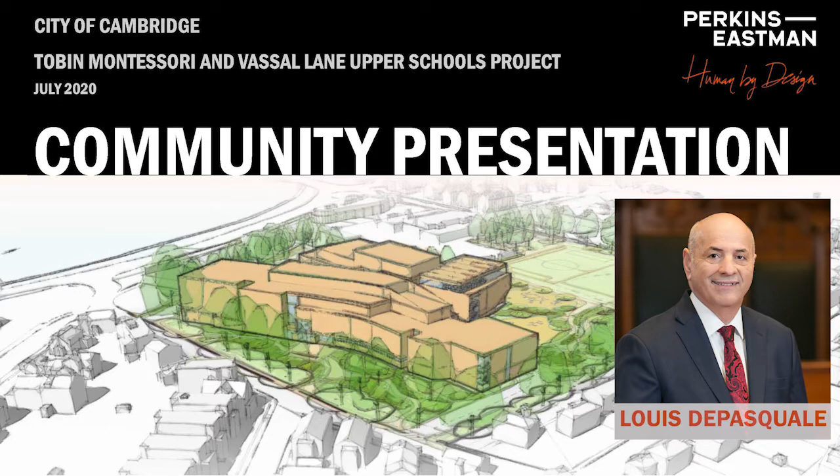I also want to thank the city, school, and design teams that have invested a lot of time and energy into refining the preferred option from the feasibility study into the preliminary design that we will be sharing with you in this presentation. The design you will see in this video is not the final design.

We will continue to seek feedback from the community. During this presentation, we will discuss the development of the Father Callahan Playground and other outdoor spaces on the site. Additionally, we will share initial thoughts on materials and building exterior concepts. As you know, demolition will not start until July 2021.

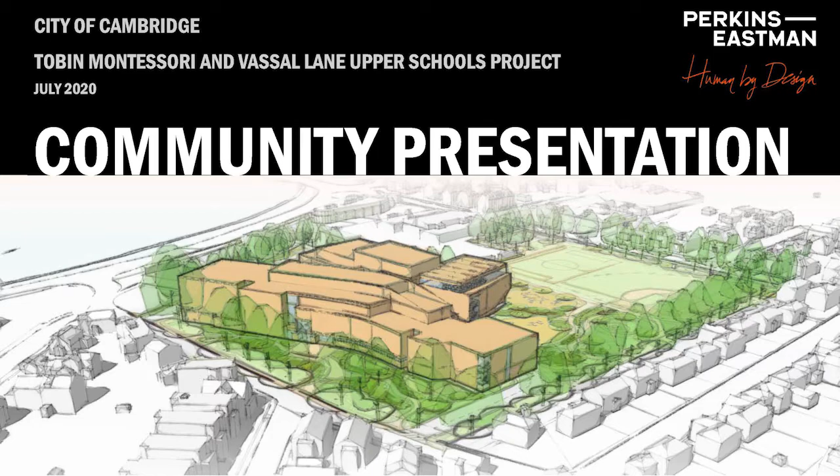Following this video, we will set up teleconferences where you can ask questions and comment on the work in progress. Your input was invaluable in creating the preferred option in the feasibility study, and we are looking forward to continuing the conversation with the neighborhood as the design develops.

Thank you, Louis. We are very excited to be sharing the current state of the design today. First, we will provide some context for where we are in the design process, how the COVID-19 crisis has affected the project, and discuss how you will continue to be able to provide input to our team.

Next, we will discuss our ongoing study of transportation on and off-site by focusing on the access to the garage structure beneath the building. Then we will review the state of the design of the site and the building. As the city manager noted, we have been working closely with teachers and city and CPS staff. Several members of the design team will share with you today how we have refined the preferred option through working with them.

This schedule shows the design phases of the project. Having completed the feasibility study, we are now in a phase called schematic design. In this phase, we are focusing on refining the plans of the building and the outdoor space, making sure that we have everything organized as best we can within the constraints and opportunities of the site.

As we will share later in the presentation, we are also beginning to explore what the building will look like. Schematic design lays the groundwork for subsequent phases of design development and construction documents.

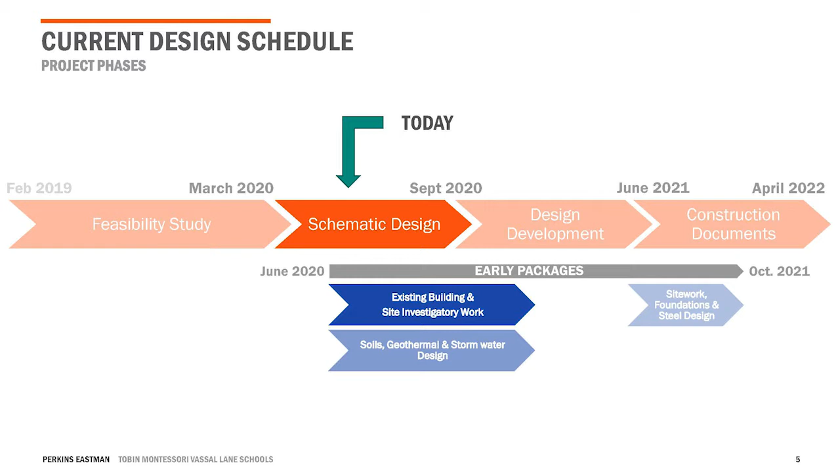This phase also allows us to prepare a few early sets of permitting packages that will enable the construction manager, W.T. Rich, to begin next year with abatement, demolition, excavation, and foundations, while we finish the construction documents for the rest of the building.

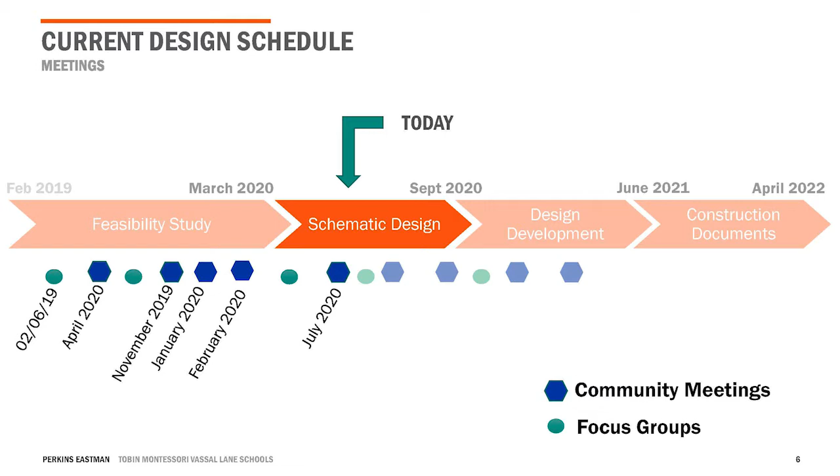You may be wondering how the COVID crisis has impacted the design and construction process. The most significant change is that the schools will not be moving out of the building this summer as previously planned. The logistics of such a move during the crisis was simply too difficult to orchestrate safely. Accordingly, the schools will stay on site through the end of the school year, and this will move the start of demolition and remediation to the summer of 2021.

As I will discuss in a moment, traffic changed significantly during the crisis, and we have also had to rethink the traffic studies that were planned for this past spring. But overall, the project design remains on schedule. Thankfully, we had a contingency planned into the project, and these adjustments have not, at this time, significantly impacted the design team. We will continue to update the schedule as the crisis continues to develop.

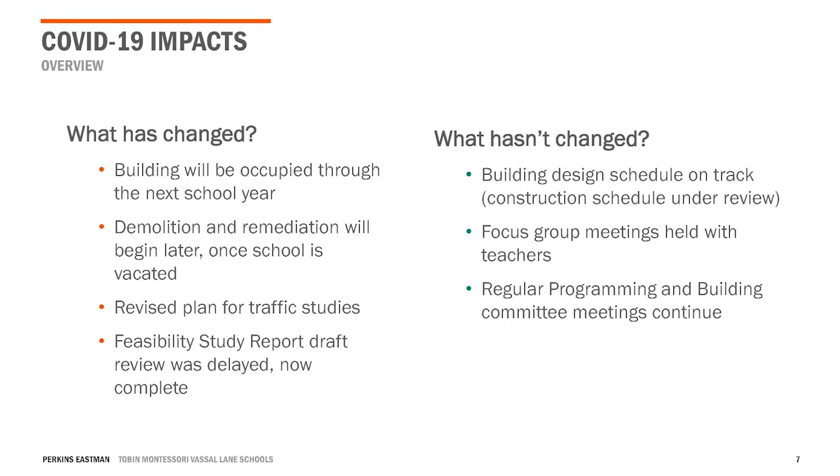Project goals include creating an environment that fosters health and wellness, and the design already includes good daylight, operable windows, dedicated outdoor air units, and MERV 13 air filters.

Given the current crisis, we have been reviewing the building and all of our projects for ways to further enhance these goals. Some measures have an impact on the layout of the building, which is especially important to review at this stage. We have been testing a variety of restroom layouts for improved safety and to encourage students to wash their hands.

At the same time, we are investigating how the building could change to a health emergency mode. One example would be increased ventilation. This allows us to design for an even safer environment while still meeting the project's safety and energy goals during normal use. In later design phases, we will pay special attention to the products we select, including materials and touchless technologies.

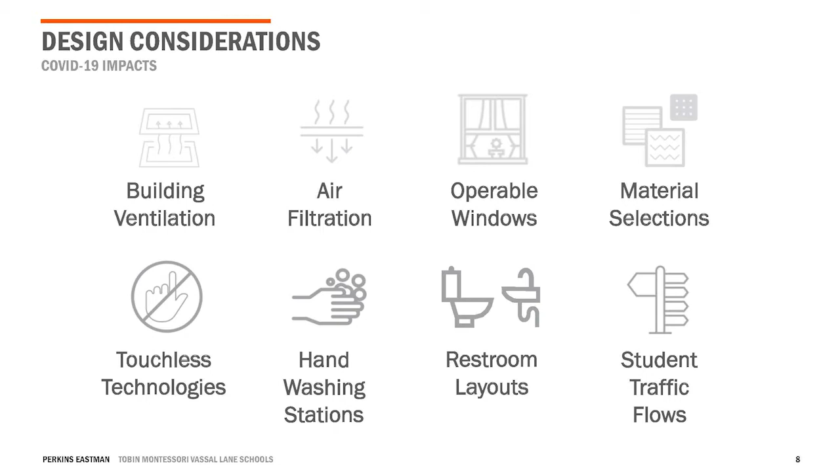We are fully committed to both a full traffic analysis and parking, transportation, and demand management plan. As I'm sure we have all noticed, traffic has been significantly reduced during the COVID crisis, but we still need to perform a transportation assessment, and it may not return to prior levels either when schools return in the fall. So we are tapping existing data, including anonymous cell phone location data collected before the crisis, to assess travel patterns and volumes representative of typical pre-COVID traffic levels.

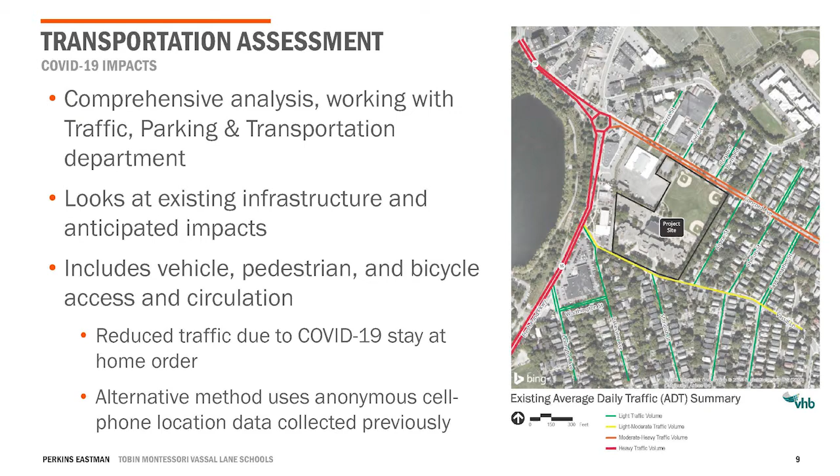Even without that data, working with our traffic engineers, we have been able to refine the design in response to your comments. Dan, why don't you tell us more about how that work is progressing?

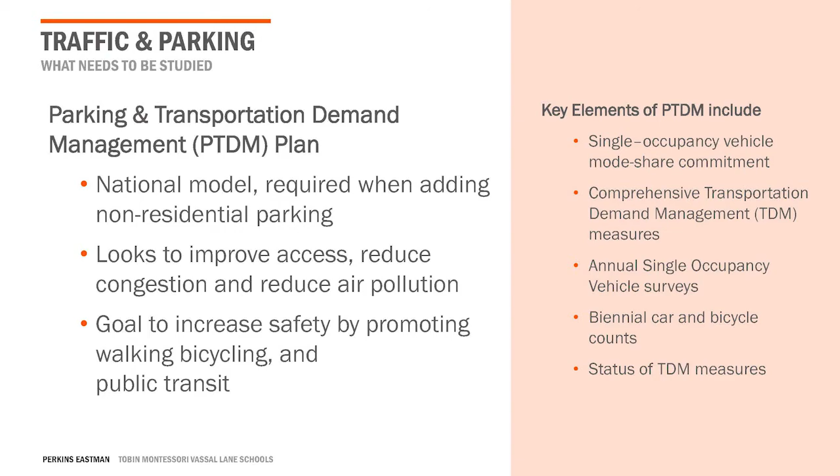Thanks, Carolyn. As you'll recall from the feasibility study, the building components have been gathered to the south side of the site to preserve and enhance the amenities of Father Callanan Playground. We'll talk a little more about how we've been reimagining the amenities of the playground and what it can offer and how the green space may be developed.

We imagine that the school will be delicately interconnected to the outdoor space. The site will have wonderful recreational space, including community pathways that connect bicycle and pedestrian routes to the neighborhood and Fresh Pond. In terms of vehicular access, we are studying traffic patterns around the site.

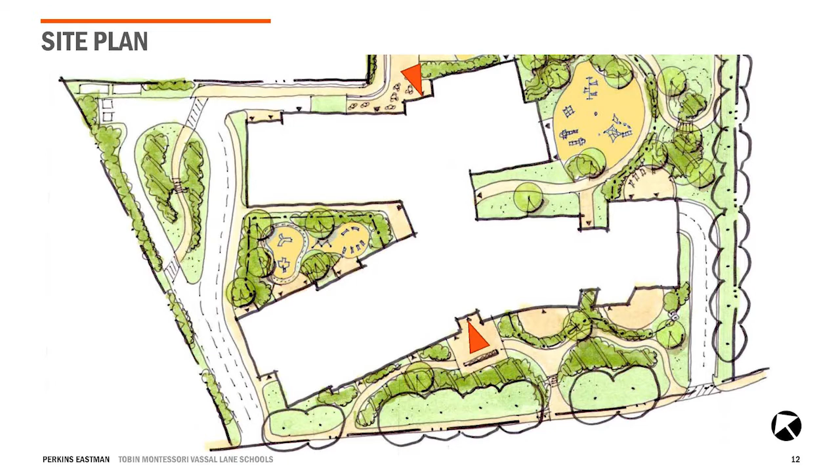We're also planning an on-site bus loop for student drop-off and pickup on the west side of the site, closest to Fresh Pond. Since the feasibility study, we have been considering how cars will be introduced into the 150-space garage under the building.

One of the goals of the feasibility study was to make the drop-off and pickup process work more efficiently and safely. One strategy to avoid unsafe conflicts between cars and buses is to separate each type of vehicle as they arrive on the site. To achieve this, in each option, roughly where the existing curb cut is on the west, buses will arrive on site and have their own drop-off in the west corner of the site, near the south side of the Armory site. This location offers the best opportunity for the buses to arrive, queue, and exit the site.

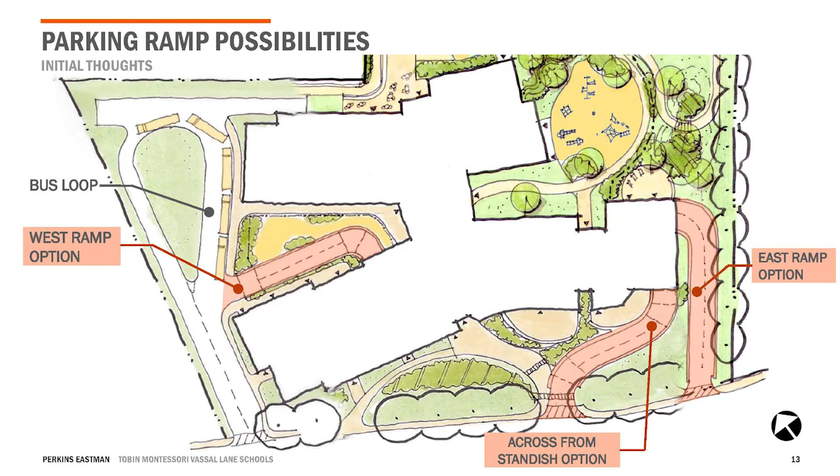With that one constant, let's walk through the options for car arrival that we are currently studying. The first option for cars arriving on site is what was shown in the feasibility study. As I mentioned, the buses will arrive on the west side of the site, and in this option, the cars will arrive on the east.

On the east, a ramp down to the garage, similar to the ramp to the parking garage at the Cambridge Central Library, will be accessed through a new curb cut. This option removes conflicts between cars and buses and can be accommodated without impacting the building program. Its challenges are that it requires some tree removal, maybe 2 trees, and it is closest to the adjacent properties along Alpine Street.

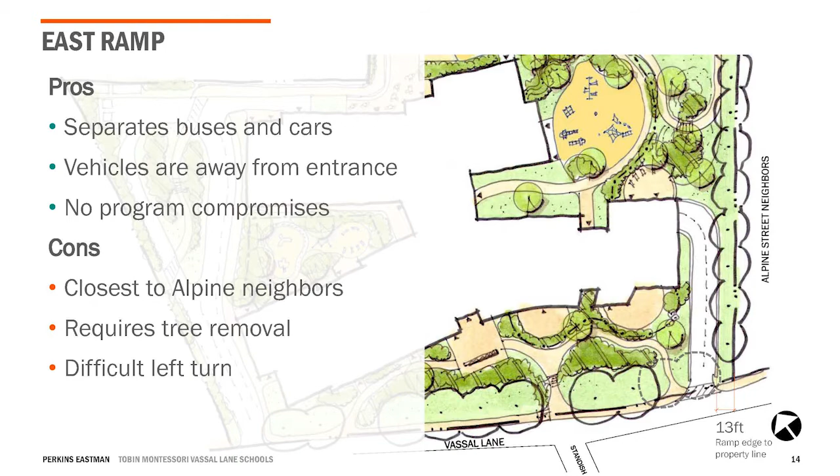Another option that also separates the cars and the buses works with the existing intersection of Vassal Lane and Standish Street. Coordinating with this intersection may facilitate the movement of cars through the community and situate arriving and departing cars where pedestrians are accustomed to safely crossing traffic.

The curvilinear shape of the ramp may also slow the movement of cars up and down the ramp, also enhancing safety. The positives of this option also include that it doesn't require the removal of significant historic trees, and this option brings the cars closer to the school's front doors.

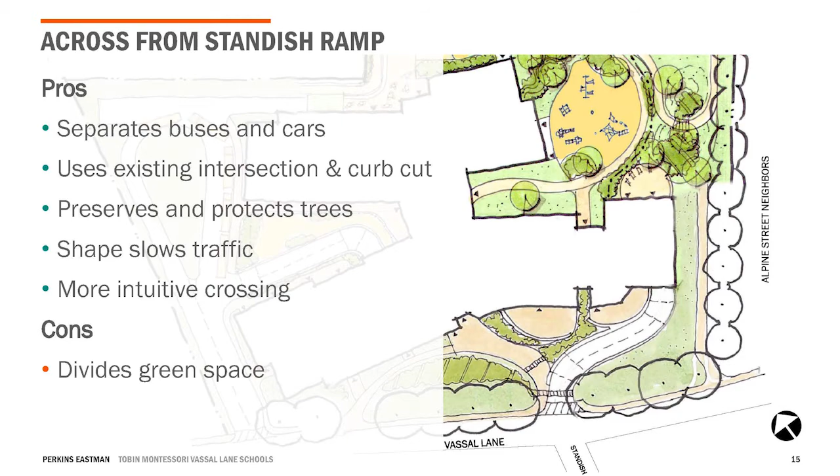A third option is to have cars access the garage through a ramp where the bus loop is on the west side of the site. This has a few advantages, including removing one curb cut on Vassal Lane and also concentrating traffic on the west side of the site. However, it has a few challenges too, including the mixing of buses and cars, which, as I noted, can raise safety concerns for the children.

And there's also a risk that there is too much congestion at this one point of access and that people will not use the drop-off in the garage.

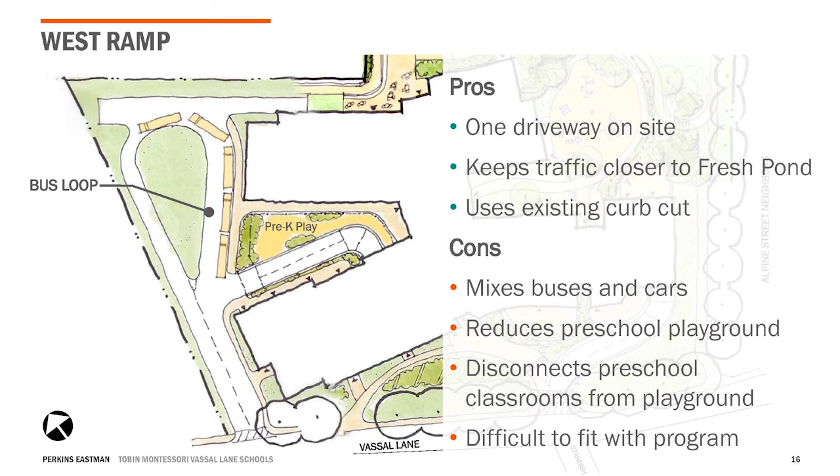That might place more traffic into the neighborhood, like the existing conditions. Chris Bradner will talk about some of our site strategies.

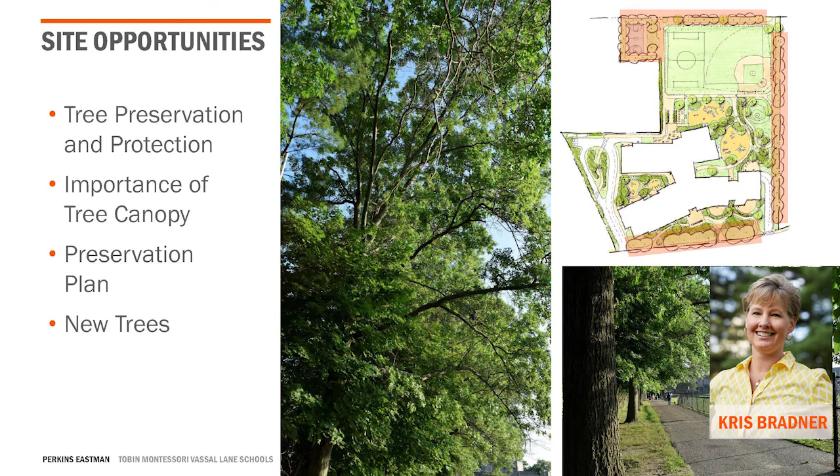Thanks, Dan. We've been working on other aspects of the site, including prioritizing upfront conversations with the city tree warden and his staff. It is the goal of this project to preserve and protect several trees around the perimeter of the site. We want to build upon the existing landscape to enhance what exists on the south, east, and north sides of the site while creating an even more attractive landscape within the campus.

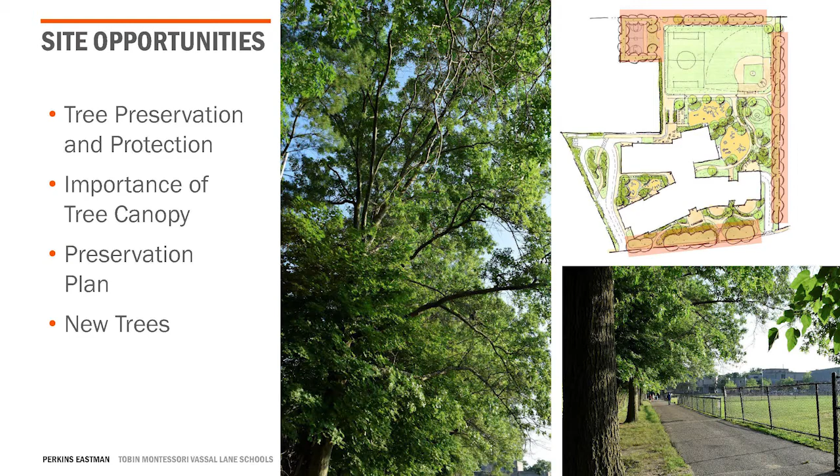We understand the importance of these mature trees as neighborhood value for shade, buffering, as well as carbon storage both above and below ground. Lastly, we will be working on meeting city requirements for tree replacements and presenting to appropriate review agencies in the coming months.

And returning to the outdoor space, you may remember the idea that we were trying to create a school building that is set within a notable landscape. Accordingly, we are continuing to develop a variety of outdoor opportunities for recreation and learning all around the building.

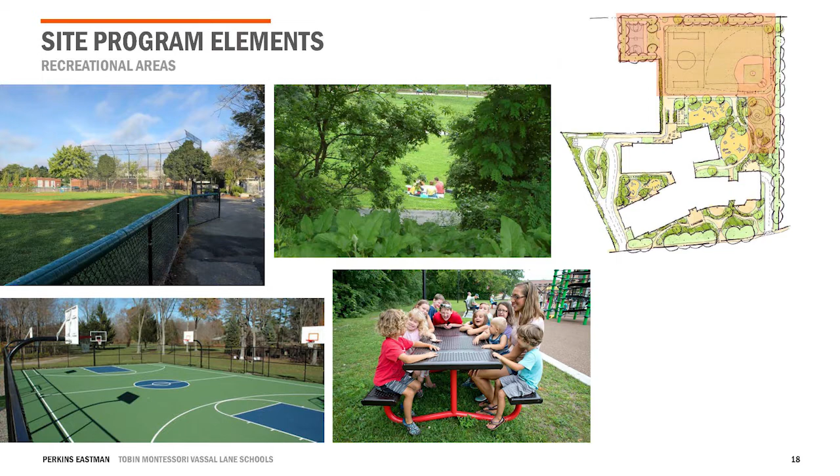Father Callanan Playground will continue to have open space and will feature a baseball diamond, a multi-use field, and a new basketball court. Directly adjacent to the fields, we will continue to develop playgrounds and seating areas that will provide opportunities for families and children of various ages to use the fields and the playgrounds.

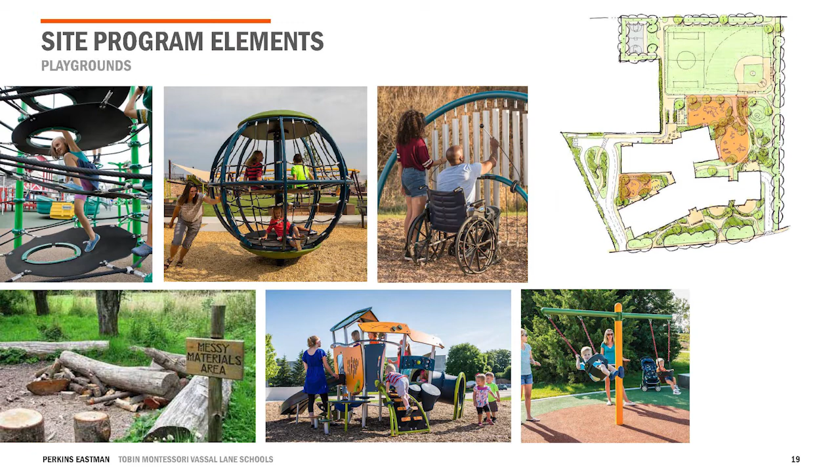The play spaces will be located at various spots around the building for ease of student circulation in and out of interior program space. Play spaces will be equipped with age-appropriate features, and materials and use will be natural and man-made for a variety of senses, imagination, and movement.

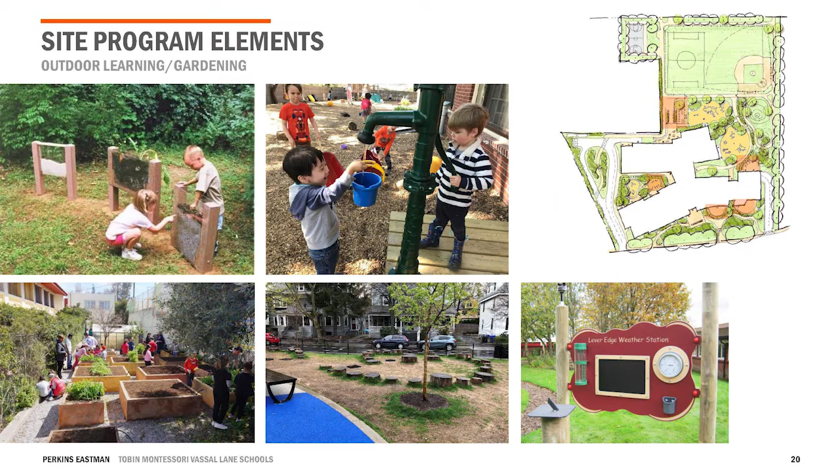Gardening opportunities will be provided for all ages and abilities. Some areas will be available for staff use directly with their students, while other areas will be coordinated with the City Sprouts program. Outdoor learning can happen anywhere, and the design of the campus will allow for a multitude of formal and informal moments for students to learn and create in large and small groups.

Lastly, we'd like to give you a preview of other ideas we're working on behind the scenes. As discussed in the feasibility study, our site's approach to stormwater and its contribution to the community's resiliency will expand beyond our site. We continue to develop the design of an underground storage facility that will collect stormwater from the adjacent city streets.

This will help to mitigate flooding in the neighborhood and around the site. We plan on taking advantage of every opportunity to overtly express the environmental design of the project and bring it directly to the students and community, visually through signage and by direct contact, showing processes. The community path continues to connect our site into the larger context of bikeways and walkways.

We are working on some other exciting ideas to extend learning from indoors to the outdoors in the courtyards. We are working to create a welcoming and sustainable landscape along Vassal Lane, creating an inviting arrival onto campus and to our new front doors.

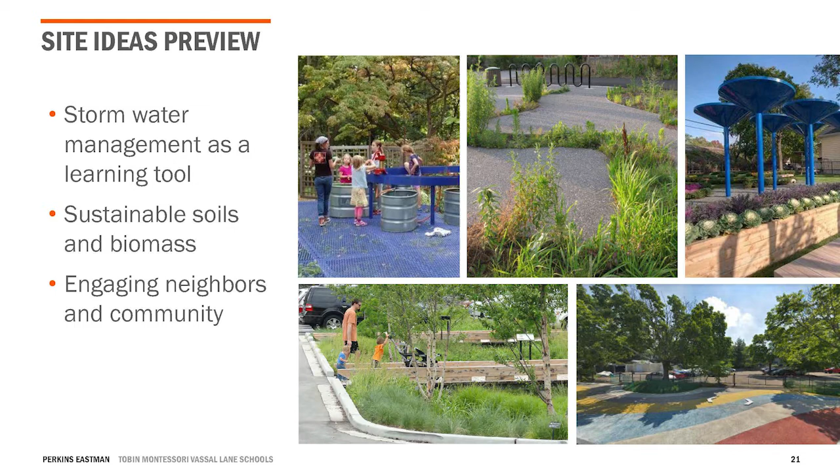Having arrived at the front doors, Sean, why don't you walk us through the current plans? Thanks, Kris. As Carolyn indicated, schematic design is where we begin to organize the building, trying to situate program spaces in the best possible location relative to the constraints and opportunities of the site. We're also trying to create significant synergies between each of the program spaces, as I'll discuss in a moment.

To do this, we've been working closely with the faculty and the staff of the schools and other representatives of CPS and the city to continue to gather information and gather their comments on the plans as they develop. While we are organizing the plans, we are also beginning to shape each space and test some of the furniture in these spaces to make sure that they are working effectively.

This is an exciting time, as it's a very significant part of creating a high-performance learning environment. Let's take a look at the plans.

First, let's take a look at the overall organization of the building. Like a village, we've organized each school into several different academic neighborhoods that will scale the learning environment to better support the students and the faculty.

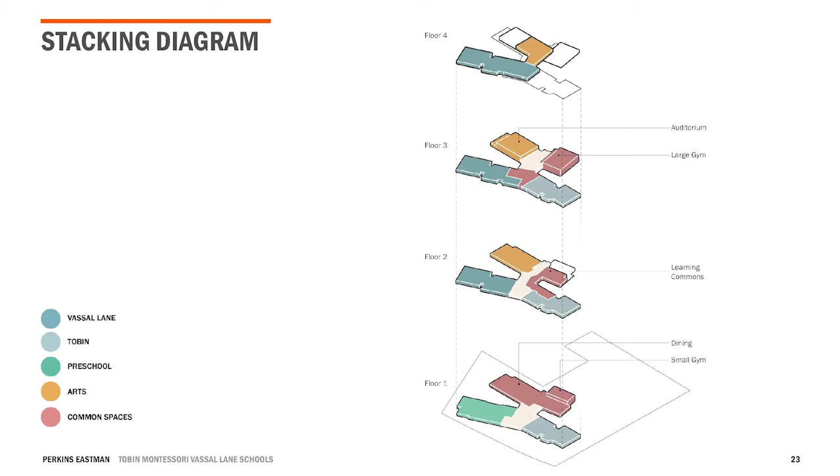Let's look at each level in a little more detail. On the ground floor, you can see the great diversity of space sizes and types that we are organizing within the building. While we don't have time to go through each space individually, let's explore the overarching organizational strategy. On the ground floor, we have the 2 front doors, one for the Tobin and one for Vassal Lane.

Each set of doors leads to a distinct entry lobby that then leads to each school's main office. On this floor, we see the Tobin's main office. As we'll see in a moment, Vassal Lane's main office is 1 floor up. This entry sequence is a major enhancement from existing conditions, and it will lead to better wayfinding and better security.

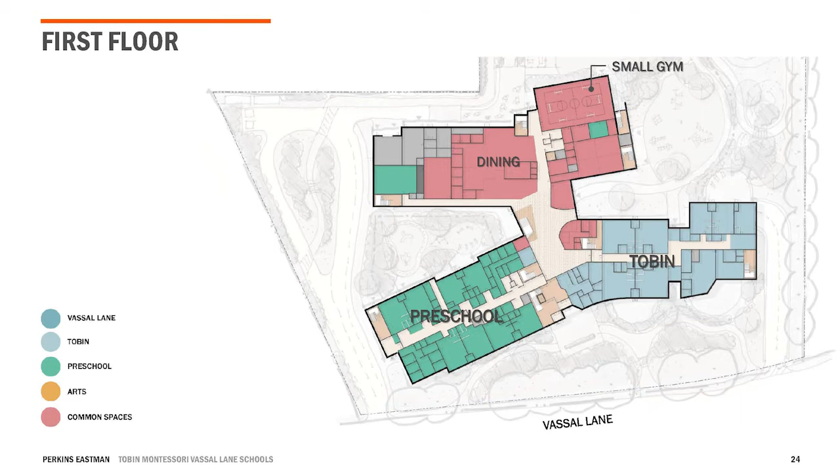To the right of the entrances on this level is the Tobin School's Children's House neighborhood, with the Special Start neighborhood integrated into that as well. To the left of the entrance are DHSP's community school and preschool spaces. In the north wing on this level, we have the lower school gym, occupational and physical therapy, dining spaces for each school, and a multi-purpose room for the Tobin and ASD students, as well as a gross motor room for the preschool.

As we look at the second floor, we can see the arrival through Vassal Lane's double-height entry lobby, which arrives at Vassal Lane's main office in the center of the southern wing. To the right of that main office is the Tobin School's lower elementary neighborhood, and to the left is Vassal Lane's 6th grade neighborhood. Each of Vassal Lane's neighborhoods are interdisciplinary, featuring classrooms, science labs, and support spaces. This will help reduce the perceived scale of the school and building, fostering stronger relationships for students and faculty. The learning commons for both schools are adjacent to each of these neighborhoods, and they anchor the heart of the school.

In the north wing, we have located visual arts and lower school music. District offices for OSS and the science department are located here as well, and there's also a professional development space for the Tobin and Vassal Lane faculty in this wing.

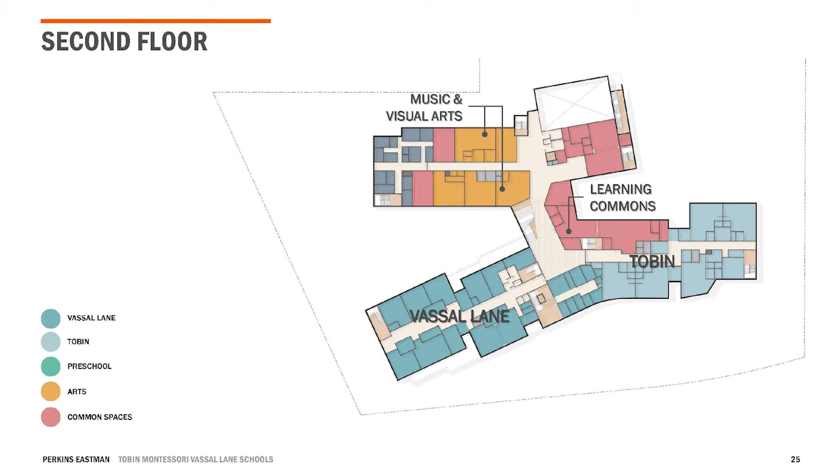The third floor features the Tobin's upper elementary school neighborhood and Vassal Lane's 7th grade neighborhood. STEAM and video production spaces anchor the heart of the school, and the auditorium and the upper school gym are located in the north wing.

And on the 4th floor, we have spaces focused on Vassal Lane, like the 8th grade neighborhood and upper school music program. The balcony for the auditorium is also on this level.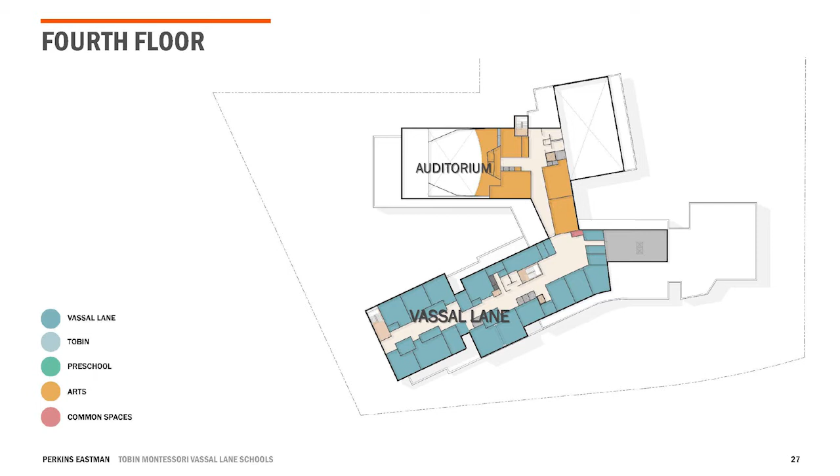Dan, why don't you tell us about some of the sustainability aspects of the project?

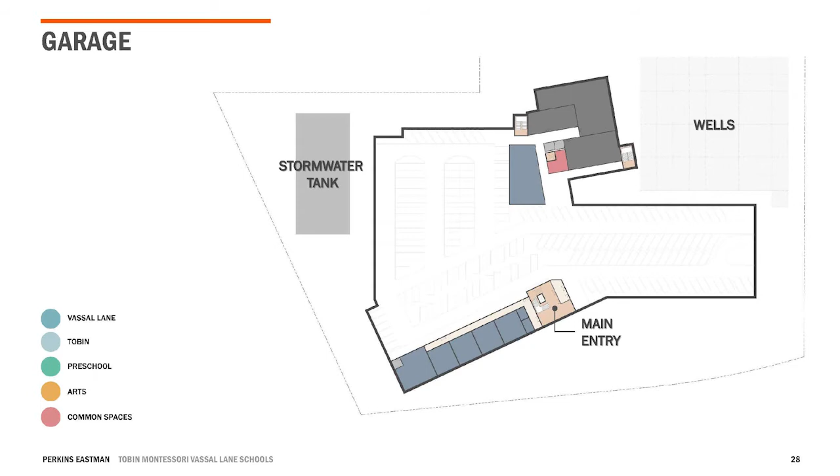We continue to respond to the aspirational environmental performance goals laid out in the feasibility study. We'll design a net zero emissions building and are striving to create a net zero energy building, one that not only burns no fossil fuels on site, but which also produces energy to meet its power, heating, and cooling needs.

To do so, we've been working to orient the building to take advantage of low winter sun angles and create shading for high summer sun. We've been studying how the windows and solar shades can support learning environments while lowering the energy demand of the building. And in this design phase, we are beginning to study the pros and cons of various heating, ventilation, and air conditioning system options.

Other net zero design considerations include reducing the embodied carbon of the building by selecting materials that take less energy to produce, for example, using wood where typically steel might be used.

We will soon be having conversations about the operations of the building and how the occupants can contribute to an efficiently run building. There are many educational opportunities both in the building and on the site that can be integrated into the school and playground design. Omar will walk us through some of that.

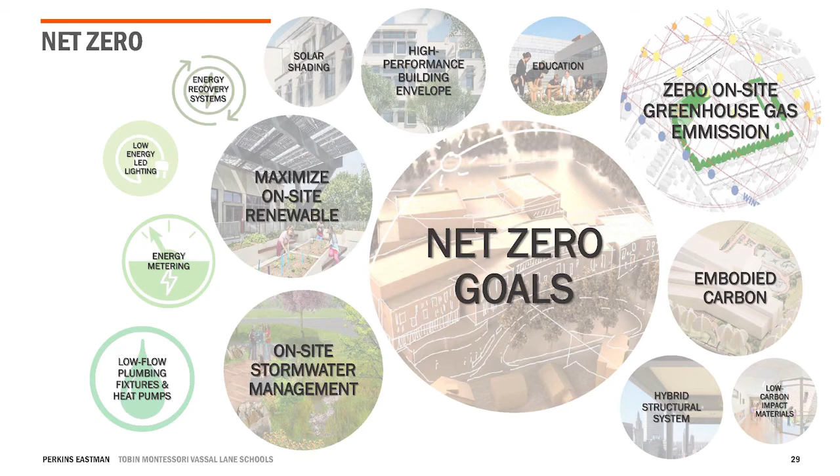Hello everyone, my name is Omar Calderon. I'm a design principal with Perkins Eastman, and I am in charge of this project. Thanks, Dan and Sean. Let's take a look at some of the analysis that is contributing to the design of the exterior of the building.

This is the first look we are taking at the exterior design, and certainly will not be the last. We share here some initial observations to begin the dialogue and discern the importance of a building that not only communicates the high aspirations of the learning community within, but is a good neighbor and a good fit in the community context.

We have high hopes for the exterior design of the building, driven by several key goals, including the creation of daylight-filled, high-performance learning environments inside the building. Equally important, however, is the idea that the building should not only be in this place, but that the building is distinctly of this place. So let's take a few minutes to explore how we might achieve this.

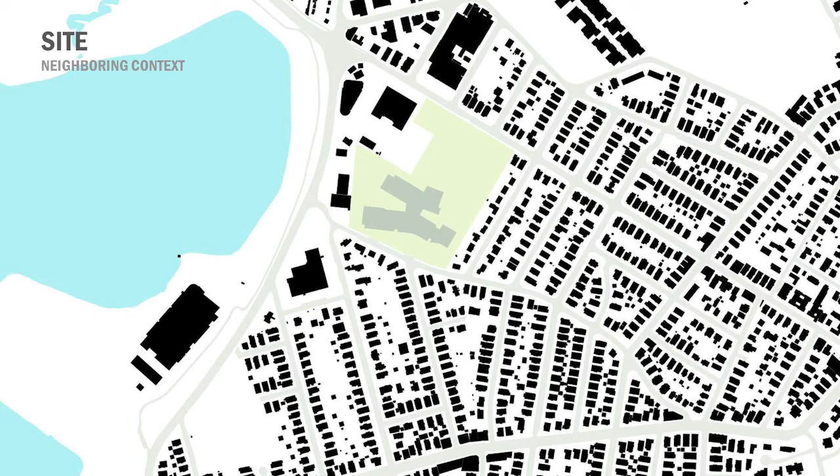How do we begin to design a building that is of its place? Well, it begins with a creative analysis, a process that seeks to understand the local history and the heritage of a place. So for example, when we look at the geology and the hydrology of the site, with Fresh Pond being an important participant, we ask ourselves, what does it mean to be a neighbor to Fresh Pond?

To find a bit of understanding, we discovered that Fresh Pond had its origin way back at the end of the Ice Age. As they retreated north, the glaciers left large pockets of ice that subsequently created kettle holes and kettle lakes like Fresh Pond. Interestingly, Fresh Pond is still part of the potable and drinking water system for Cambridge.

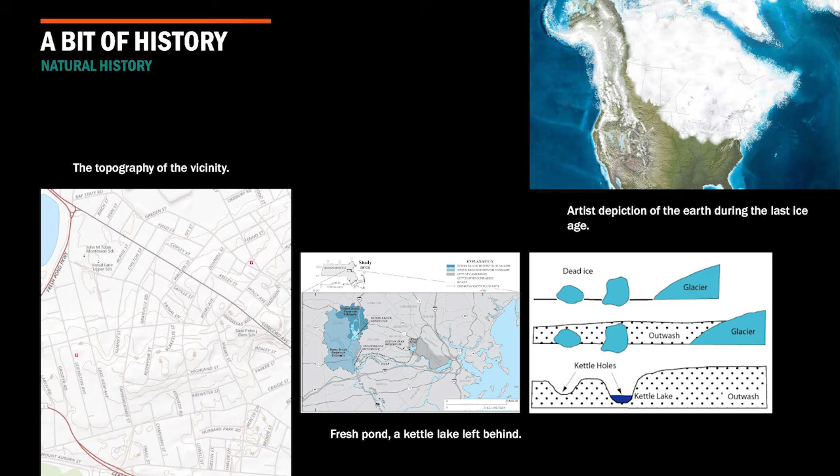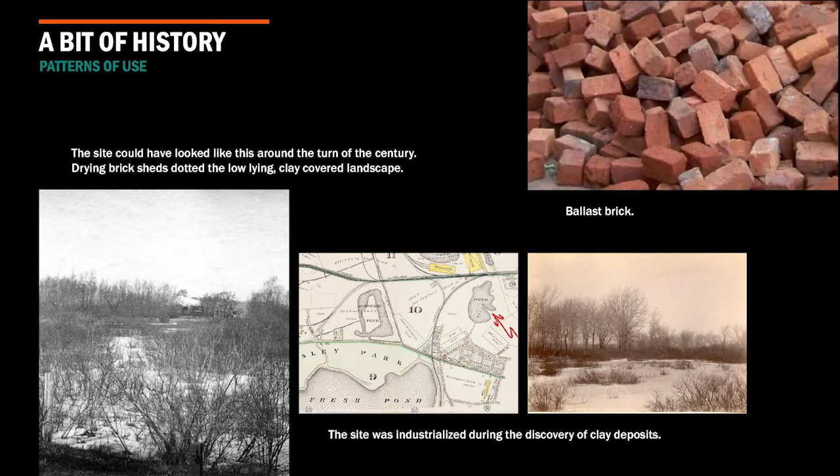More recently, the geology of the site influenced another development around Fresh Pond and on the site. Extensive clay deposits on and around the site drew brick makers to quarry and manufacture bricks for masons working in the local building trade. As the site was excavated for raw materials, several buildings likely occupied the site to process materials, create, and dry the bricks.

Once the brick industry moved onto other sites, the quarry it left behind became an opportunity to deal with the waste generated by a growing city. For years, household waste was dumped on the site and was ultimately covered up.

In the late 1960s, the site became attractive to address the need for new schools in Cambridge, with the opening of the John M. Tobin School in 1971 and Father Callanan Playground. The site became largely what we see today. However, evolution continued as the programming in the building changed to address the needs of the city's students.

In 2008, the Tobin Montessori Children's House opened, offering a self-guided, inquiry-based curriculum, and it was joined in 2012 by the Vassal Lane Upper School.

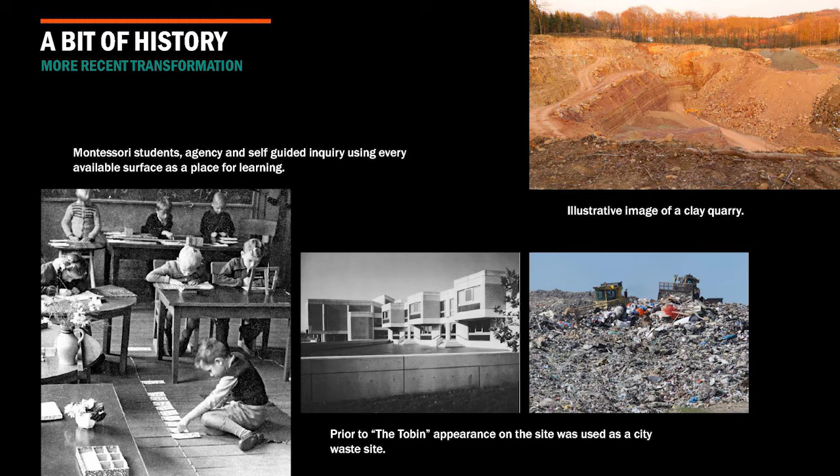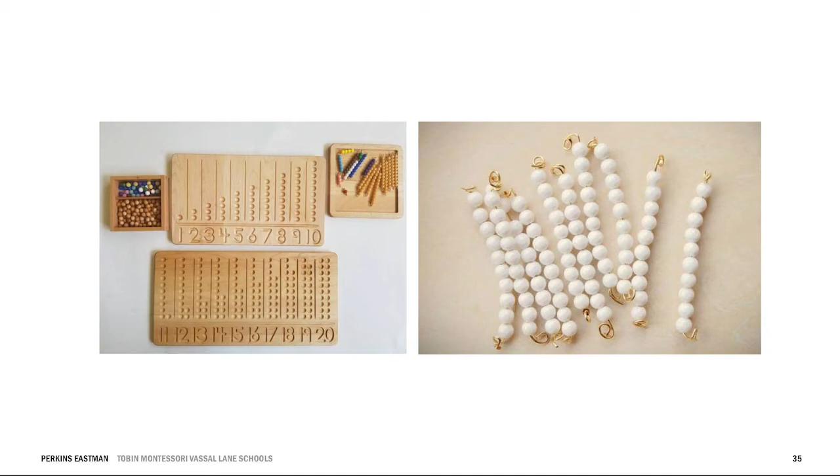We find the Montessori materials very beautiful. We take inspiration from the Montessori philosophy, which emphasizes the use of specific materials that have an engaging and tactile quality. These emphasize simple, beautiful, and natural materials. Now, if we were to design a building that matched this aesthetic, what would that look like?

So in summary, this very brief history of the site has taken us on a tour of the geological legacy, the materials that shaped the site, primarily water and clay, the industrial past and the modular building materials that were created from the very fabric of the site. But this story is actually not quite finished as the site continues to evolve.

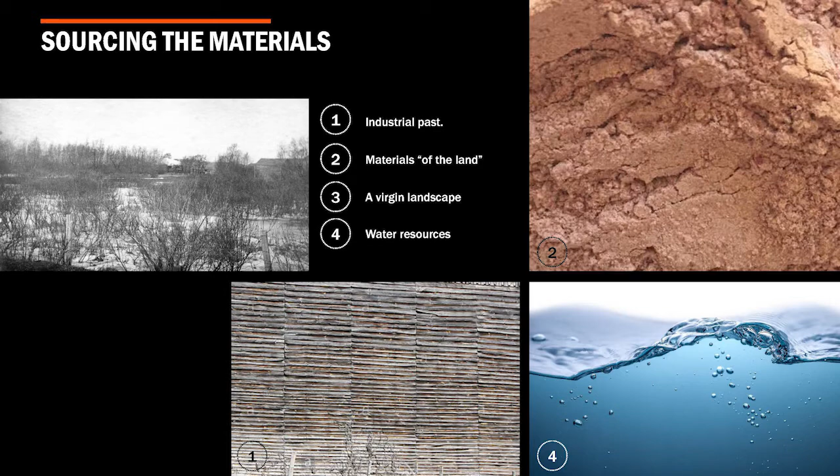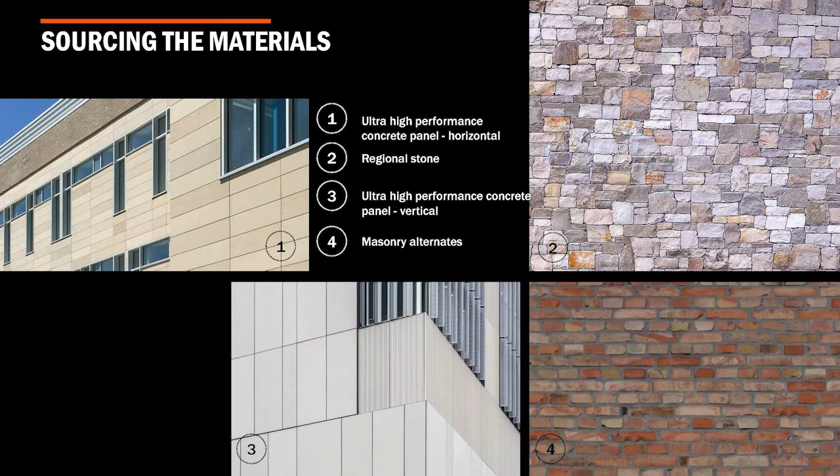This connection to the very makeup of the site and the industrial past inspires us as we begin to think about the materiality of the building. We ask ourselves, can we create a building that references the deep geology of the site and the modular building materials once created here from those resources, while also honoring the continuing and forward-facing evolution of the site as it serves the needs of the community?

In addition to the history and materials of the site, other factors also inspire the way the building should look and help to root it deeply to this specific place. For example, the building is being designed to conserve significant amounts of energy relative to conventional school buildings. We're striving to reduce consumption as we target an aggressive EUI of 25 kBtu per square foot or less.

But to achieve these goals, we begin by making a building that conserves resources through an energy-efficient building envelope, and by inspiring behaviors in the residents within that reduce plug loads and encourage the use of daylight.

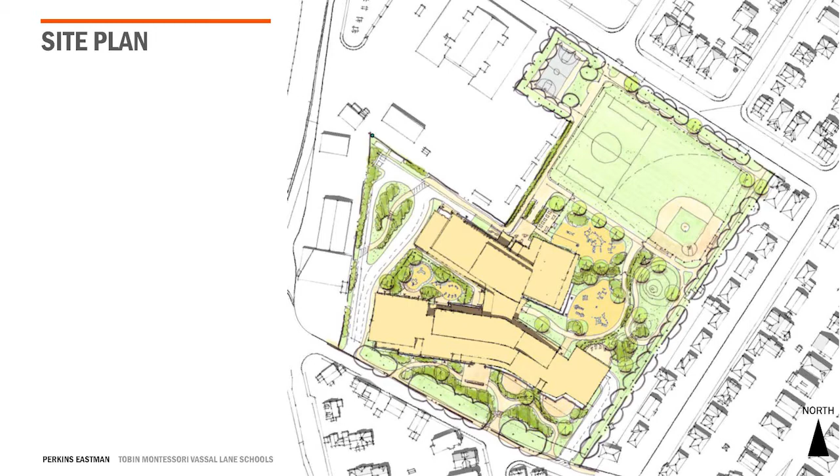A significant insight that came out of the community reviews was the preservation and enhancement of the Father Callanan playground. In reviewing this site plan, it can be appreciated how the school building really defers to the play spaces and green spaces, to the point that the green in this illustration really surrounds the majority of the building.

Great daylighting is derived by response to how the sun moves across the site. Orienting the program of the building on the east-west axis allows us to create north and south-facing facades that carefully control sunlight entering the building. Our goal of creating a high-performance learning environment is enhanced by designing windows specifically organized to bring in diffuse natural light, while other windows provide opportunities for views out and enhance the experience of the children within.

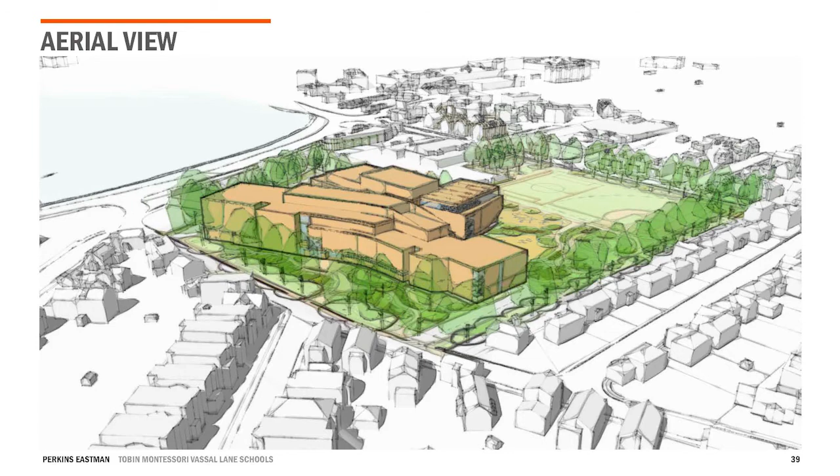But we're also sensitive to the scale of the neighborhood, as is evident in the massing of the building. The southern facade is not a singular long facade, but rather a series of distinct planes and volumes that push and pull to begin to describe the academic neighborhoods and classrooms within. We have found that with this building, every side has a role to play and a responsibility to observe.

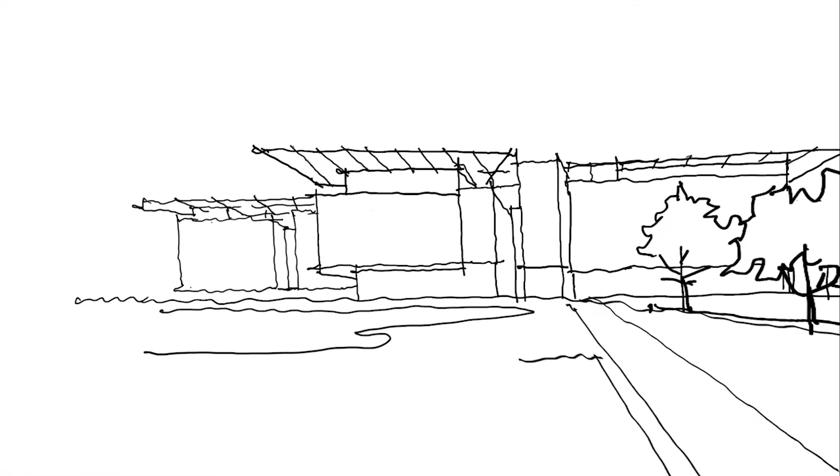Approaching the playground and school from Concord shows us that the school is significantly set back from the street. Remembering that this is the side of the building with the gymnasium, the cafeteria, and auditorium—the so-called large spaces of the school—the scale of the building here can afford to be a little grander, more civic, if you will.

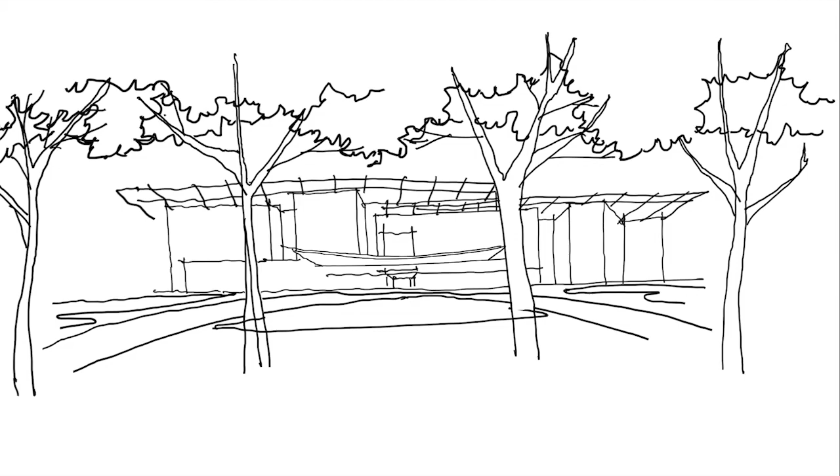On the Vassal side of the building, the story is a little bit different. Instead of one single long, large building, we're striving to create a collection of smaller buildings set within a notable landscape, almost as if the building was made of smaller buildings that happen to be connected together.

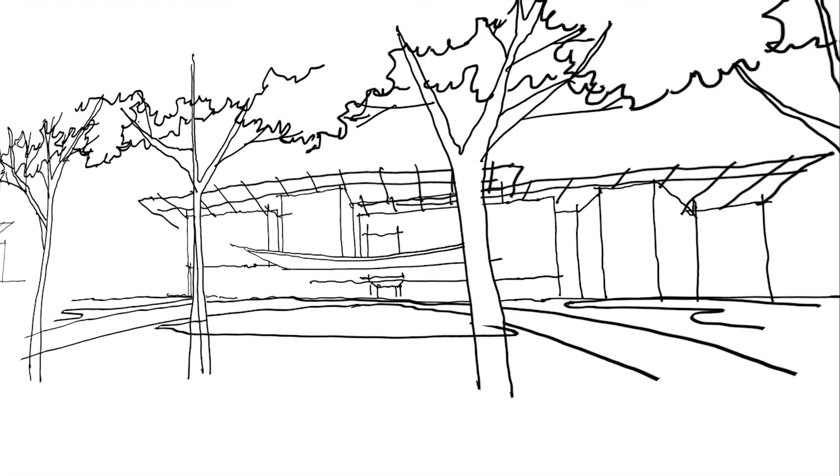This collection of buildings becomes smaller in scale on the east side of the site, where the building will be closest to the adjacent houses. Conversely, the scale steps up as we get closer to the adjacent commercial and industrial uses on the west side. While we're breaking the building down into discrete volumes and masses, we can leverage the sun to provide us with a common element to tie the composition together.

And speaking of the sun, we are optimizing every surface available for power generation. We're also exploring the design of photovoltaic trellises that may provide us with a practical and elegant way for the building to meet the sky.

And that is really committed to inspiring students in the community to integrate these systems into the curriculum and into their homes.

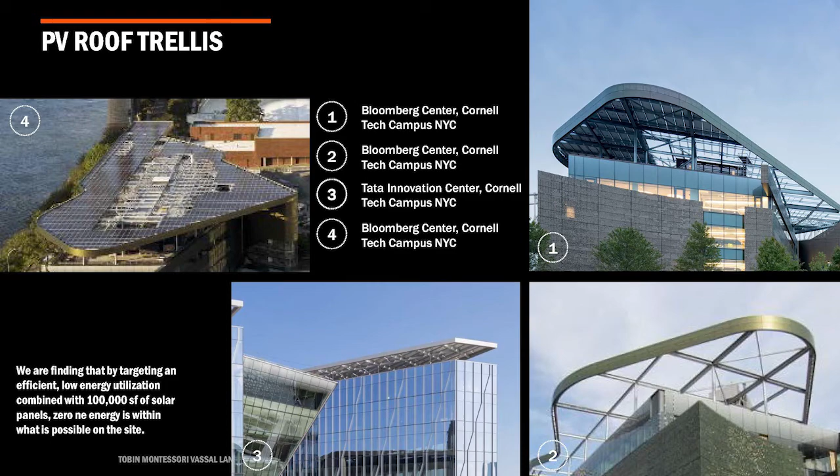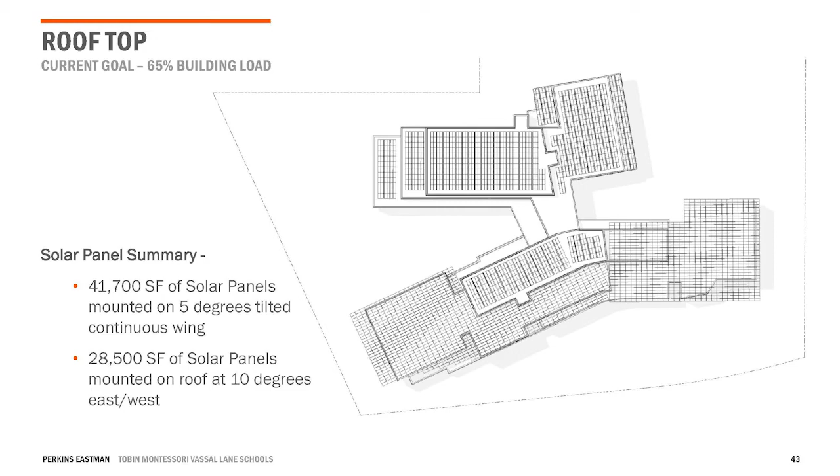While we are reducing energy consumption, we are also exploring how to optimize the power generating capacity of the building. These photovoltaic systems will help the building pursue net zero energy, which will help us reduce the building's impact on the environment and our health and well-being.

Now, let's bring all of these ideas and analyses together and see how they can begin to shape and inspire a design for the building exterior.

For example, here you see that idea of meeting the sky—a building design that has a base, a middle, and a top, complemented by a pronounced way of meeting the ground in the form of the masonry material that you see here. This works in harmony with the horizontal breaks in the massing that I mentioned before by reducing the perceived mass of the building vertically.

This creates a more interesting scale visually, and it enhances the experience as you get closer to the building. So we're studying the use of a masonry material that enhances the visual richness and tactile quality of the base of the building as pedestrians walk by or get close to it.

And the windows further reduce the scale of the building, with the upper windows bringing in natural light and more playful windows lower where the children are so that they can look out across the site.

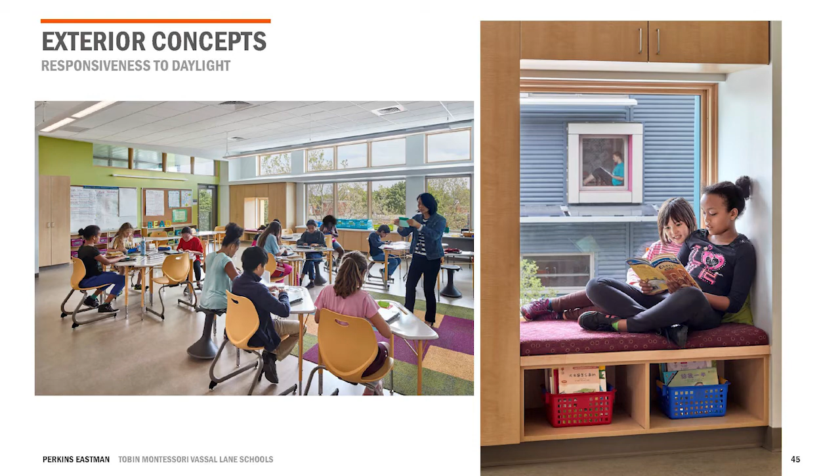Inside, you can see in this school that used a similar approach to window design, that the upper windows provide generous, glare-free, diffuse natural light, while the lower windows provide opportunities to create smaller scale places and views that inspire learning. With recent developments in computer modeling and analytical software becoming more available, we have been studying and refining the size and location of each window, shading devices, and light shelves to optimize the building to approach daylight autonomy without increasing glare.

Research has demonstrated that children learn more effectively in a well-daylit learning environment.

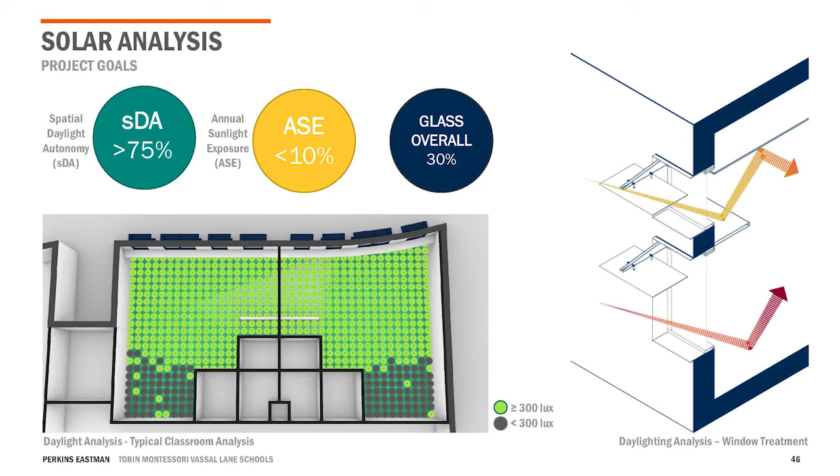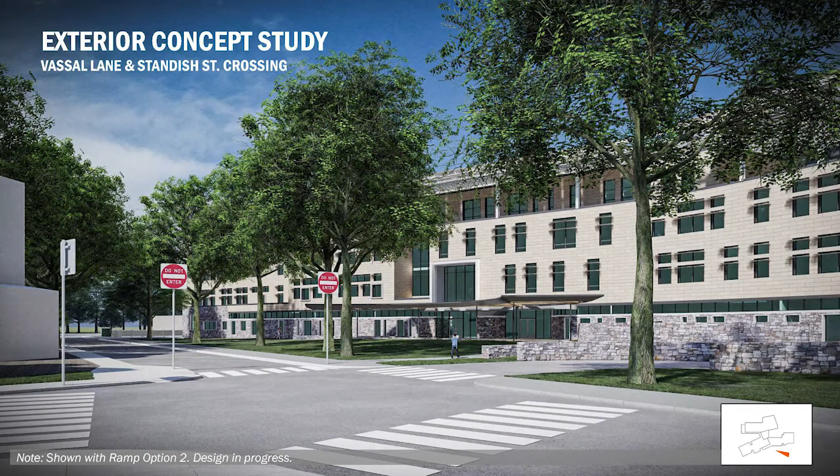Now, if you were to stand at the intersection of Vassal Lane and Standish and look towards the school, this would be the view. You can see here illustrating how some of the pedestrian movements would be organized to also help facilitate the safe movement of vehicles in and out of the building into the garage.

You can see the curb cut there aligns with Standish, which is where the existing curb cut is located today, maintaining similar patterns of movement around the site, but also introducing that garage entrance that would facilitate all vehicular movement to be within the site and immediately below the first floor.

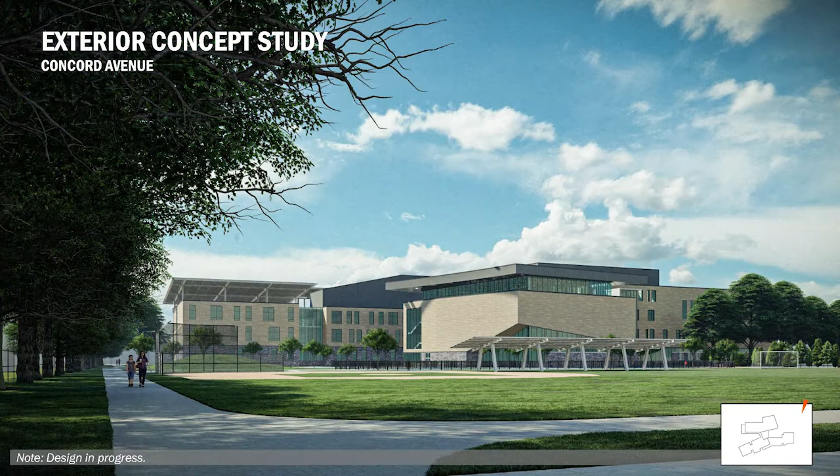Here's a view of the building looking from Concord diagonally across the site, and on the left-hand side we see one of the pedestrian paths that will be maintained to preserve that pedestrian connectivity through the site and into the site.

And some trellises, an idea behind trellises that would add on to the photovoltaic panels already on the roof to increase the power generation capacity of the site. This also illustrates the scale of the building being a little different, almost having a gymnasium that feels like a pavilion sitting adjacent to the playground.

Now, if we were coming in from Fern, perhaps on a bicycle, we would engage with the multimodal path that exists today on the site. Looking at the site plan, you would appreciate how we have extended that so there's through connectivity, multimodal through connectivity, across the site.

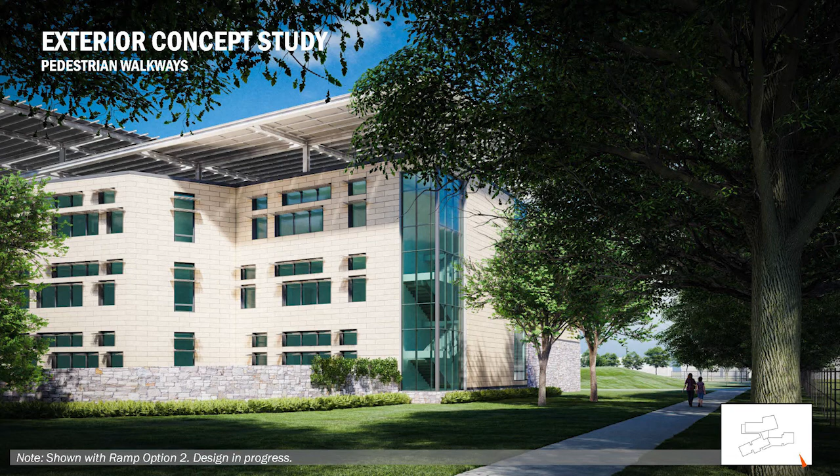Here is a view of the pedestrian pathway from Vassal Lane along the east side of the site, showing the version of the ramp that would be in front of the site connecting with Standish.

The idea here is that we can aptly landscape the zone, minimizing the impact of the automobile entrance, hiding it completely from view from this side of the building, but more importantly providing and maintaining a safe pedestrian pathway that does not have to negotiate cars.

You can also see here how the scale of the building drops down to 3 levels, remembering that we have the adjacent homes along Alpine Street, trying to reduce the scale of the building to fit in with the scale of the neighborhood.

And so that rounds up this part of the presentation, and we, as always, look forward to continuing the conversation with you as the design develops.